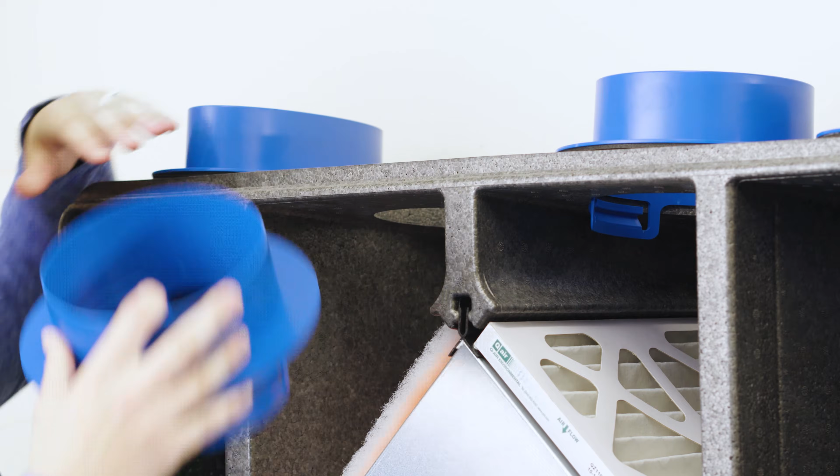The Aeri MT is a top port design that accommodates numerous vertical duct orientations. With the duct collar attachments positioned at the top like this, the ERV can be mounted in a variety of ways. The Aeri MT can be mounted to a flat surface, like a floor or shelf. It can attach to a wall, or it can even be suspended from ceiling joists.

Before we get started on discussing the different installation methods, I want to note that regardless of the mounting method chosen, make sure to leave sufficient clearance on the right side of the unit for access to the controls terminal and the power connection. The easiest way to mount this Aeri MT is to install it on a flat surface. Given that the Aeri MT is a very lightweight unit, it must be properly secured in place. If it's not fastened properly, unit vibrations could walk the unit off the surface.

For mounting on a concrete or stud wall, RenewAire provides most of the mounting hardware required. Inside your Aeri MT kit, you'll find EPP foam auger style screws and French Cleat hanging brackets. Note, the French Cleat should come with 2 opposing brackets, and both are needed for the installation.

You'll need to have a 6mm Allen wrench on hand for the installation, and it should be noted that fasteners and anchors for wood and metal studs, drywall, or masonry walls are not included in your Aeri MT installation kit, so you'll need to source these separately. So now that we have our hardware and tools assembled, let's mount this ERV directly to the wall.

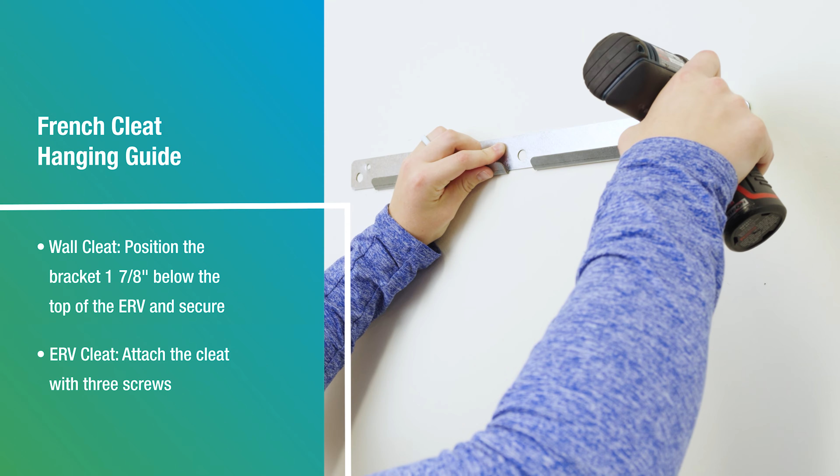To start, determine the required location for the French Cleat on the wall. The bracket will sit roughly 1 7/8 inches below the top of the unit. Use the appropriate hardware for fastening the bracket to a concrete foundation or stud wall through the 2 1/4-inch holes. Make sure to locate the studs or location on the concrete wall and attach with your preferred method.

The other French Cleat needs to be positioned in a downward-facing orientation and secured to the back of the Aeri using the auger screws. Use a 6mm Allen wrench to screw the 3 foam auger fasteners through the 3 3/8-inch holes on the bracket and into the foam. The bracket should be oriented such that the 45-degree tab touches the placement rib on the back of the unit.

Once the brackets are fastened to both the wall and the unit, lift the Aeri up and then carefully lower down to engage the cleat onto the receiving wall cleat. The mounting feet should sit flush against the wall at the bottom of the unit to prevent rocking.

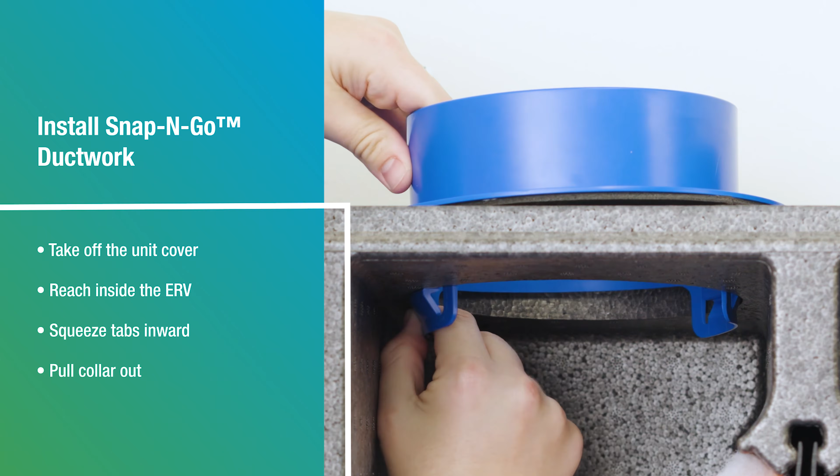Each Snap-N-Go duct collar contains a snap feature that can be used when installing flexible ductwork. All duct collars come pre-installed on the unit. To take off the collars, remove the unit cover, reach inside the ERV, squeeze each duct tab towards the center of the unit, and pull the collar up and out of the Aeri MT. If there is resistance, the tabs have not cleared the foam. Use greater pressure to move the tab toward the center of the opening.

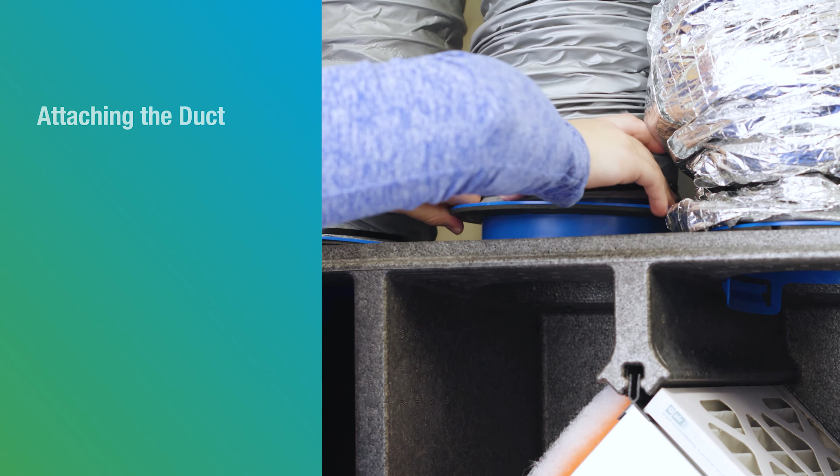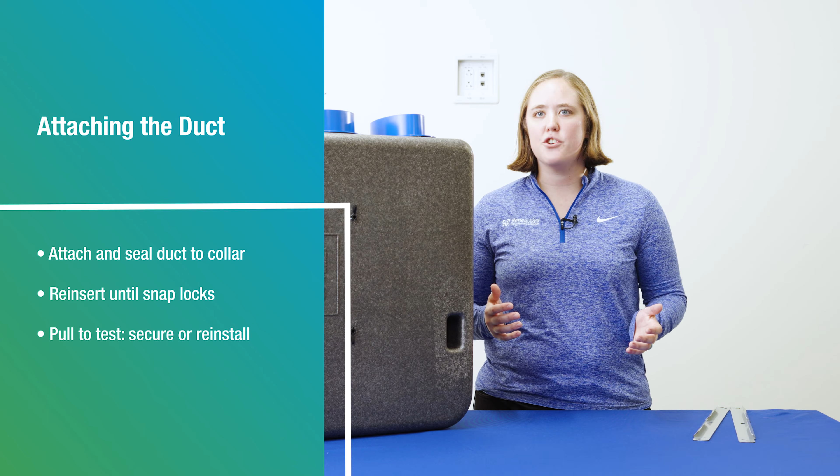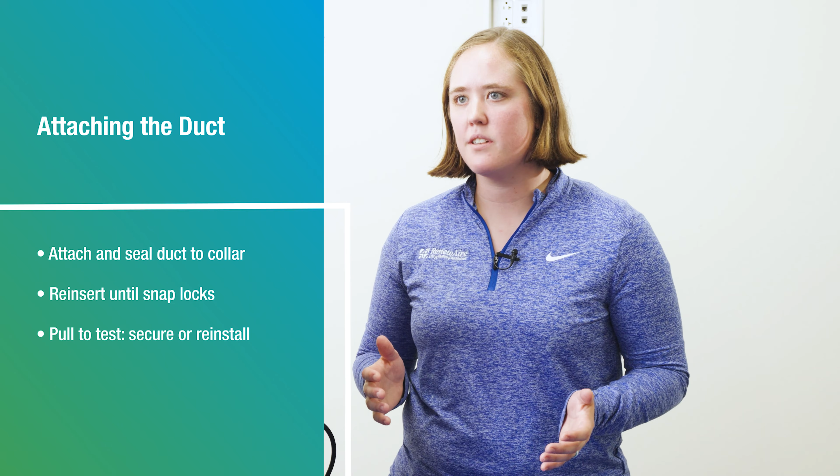Once the collar has been removed, the flexible duct can be attached and sealed to the collar. When the duct is secured, reinsert the collar through the opening on the unit. The duct collars are designed to provide an audible and tactile snap, letting the installer know proper installation has been achieved. You can also check proper connection by attempting to pull the duct away from the unit. If installed properly, the collar and the duct will remain in place. If the duct is easily removed, reinstall such that the snap tabs contact the inside surfaces of the opening.

Now that you have your Aeri MT mounted, you're going to want to start it up with the proper airflow settings. Please watch the next video in our series and learn how to set the controls and flow settings for Aeri.